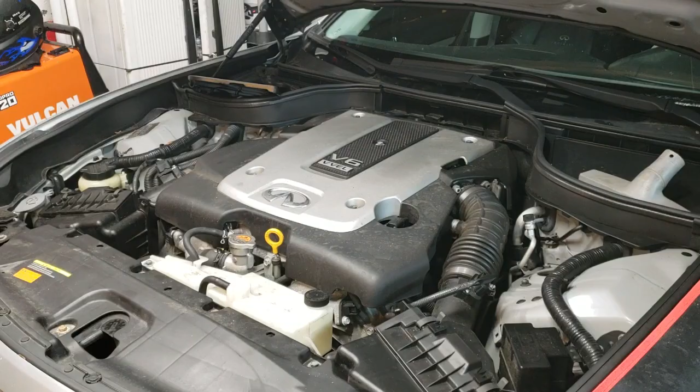Here I got my '09 Infiniti G37X, and it has a low oil pressure code. What I'm going to do is show how to take everything out from beginning all the way to the end, and then put it back together step by step.

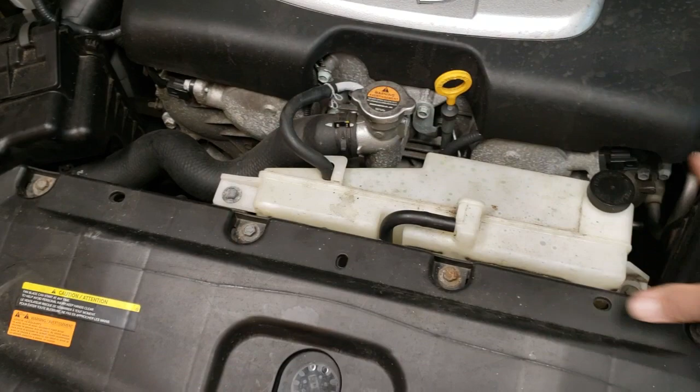Some shops charge $3,800 to fix this, others want $2,000 because it's kind of intensive. You got to take off everything here in the front, it has to come out. Some people take the bumper out, but I'm not going to go that far. I think just taking off the radiator fan and a lot of the accessories in the front should be more than plenty to access the oil galley gasket.

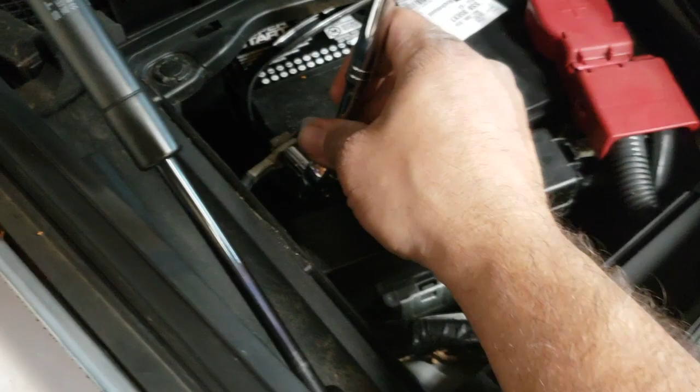One of the first things I want to start out with is disconnecting the negative on the battery. Alright, the next thing we're going to do is remove these 5 bolts to take off the engine cover. Here goes 1, 2, 3, 4, 5. I'm going to do that with a 10mm bolt.

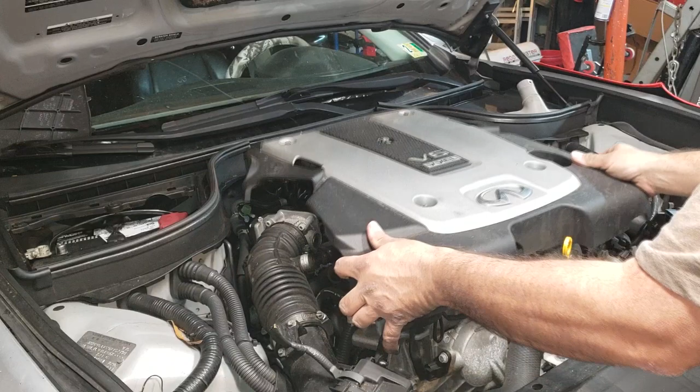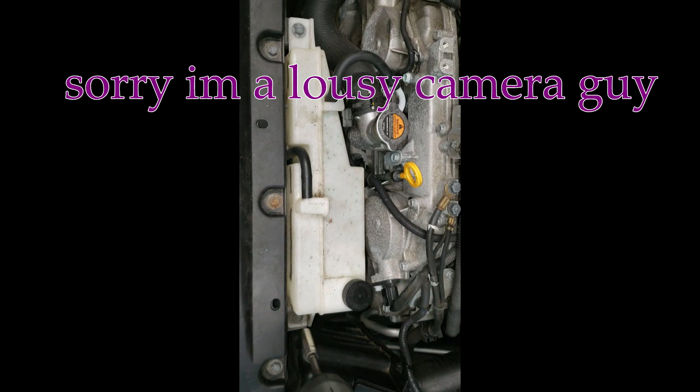Alright, the next thing we're going to remove is this radiator reservoir, also 10mm. Then disconnect the hose.

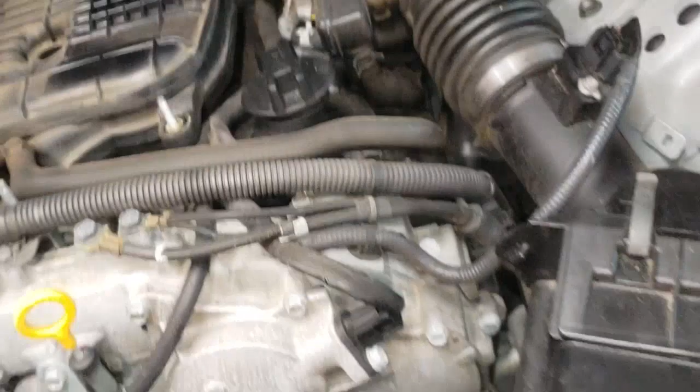Now the next thing we're going to do is remove this mass airflow sensor, and now we're going to do the same thing to the other side. Easier with one hand. What we're going to do is cut this little tie right here, move this out of the way, and do the same to the other side.

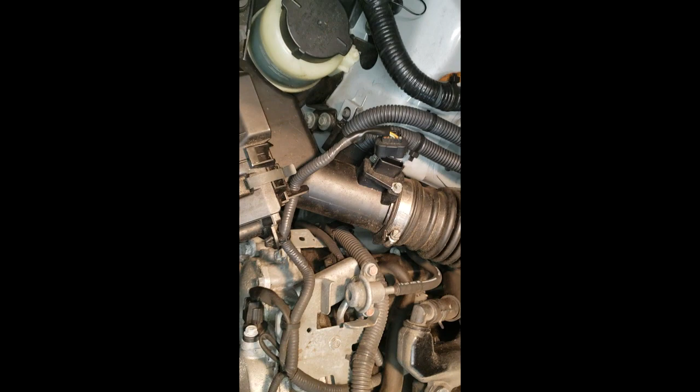Next thing, we're going to remove this air box, 10mm. Then we're going to loosen up this clamp, 8mm. And we're going to put it away.

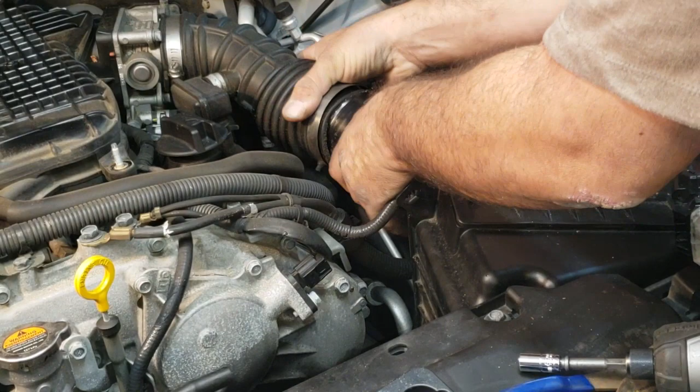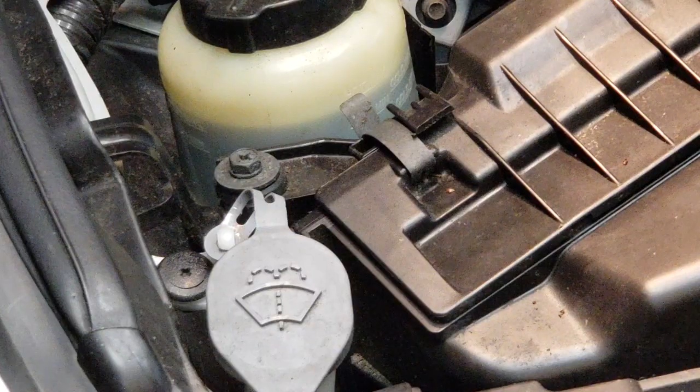Lift up. Same thing, I'm going to loosen up this clamp, and I'm going to remove this one bolt for the left air cleaner. Separate the hose, and lift up on the air assembly.

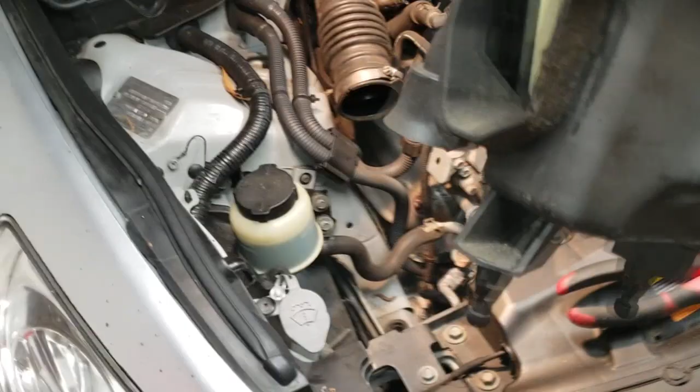It's tough. The other reason why it's kind of hard to pull out is it has a little rubber grommet on the bottom that it goes to, you can see it down there, and it snaps in, there's 2 of them. That's what makes it harder to take out. Now I'm going to take the bolt and put it back in so I don't lose them. Same thing on the other side.

Alright, the next thing we're going to do is remove the undercover.

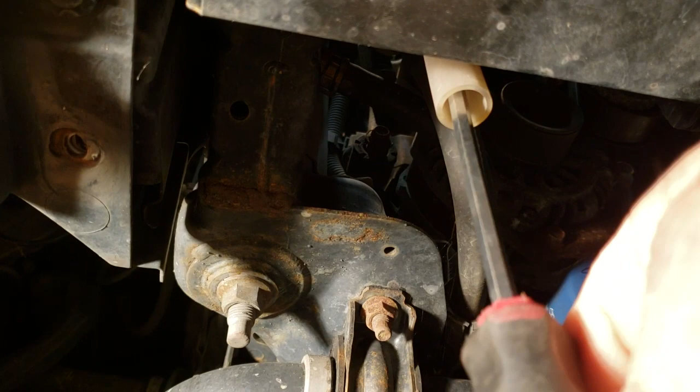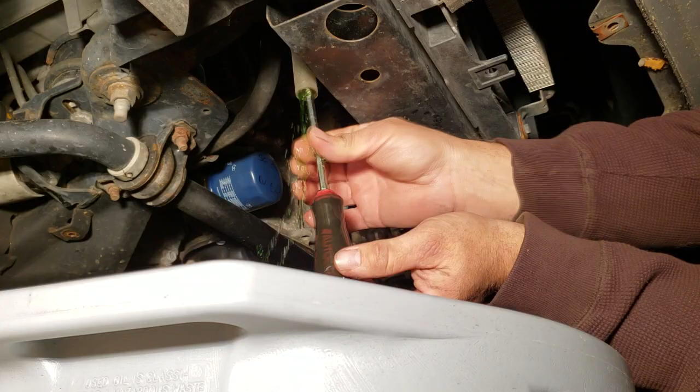And from the top, we'll remove the radiator cap. Comes out a lot faster.

I know I'm going to get a lot of questions like where did I get the instruction book for this car, because I've looked around and I have not been able to find a book for this car at any auto parts store. I haven't tried the dealership, but I did look online, and online there is a website where you can actually get this book. If you go to nicoclub.com, on the bottom right in the middle it says service manual.

You click on the service manual, and you scroll up to right there where it says Infiniti.

Sorry, I don't know how good this video is going to show from the camera to my TV. It doesn't look like it's going to show very well, but it's the best I can do right now.

And then you find the car that you currently have, like for me, I had the G37X, or just the G37. If it'll open, that'll be great.

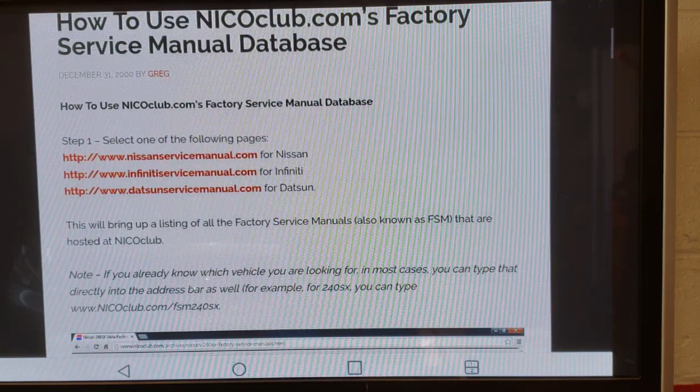Okay, try that again. Go into the Infiniti. Oops, my fat fingers hit the dots on one. Let me try it again. Infiniti.

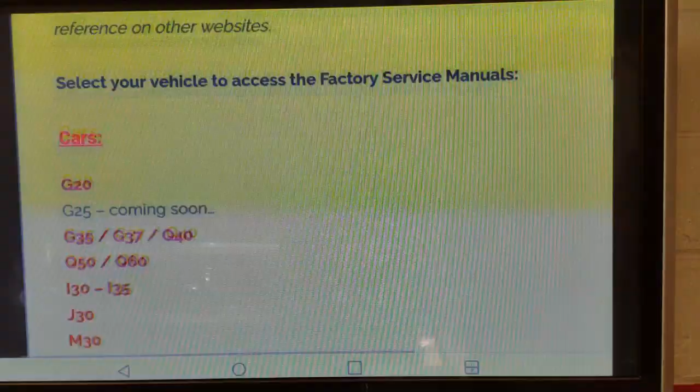Okay, Infiniti service manual, and then you click on the G37. Okay, you scroll down and you find the year. Mine is a '09 sedan.

And right there, these are all the things, all the contents for your whole car. It took me a while to figure it out, but I did print it out, and as I opened each one, I was able to write down next to it what it is, so I can use it as a reference.

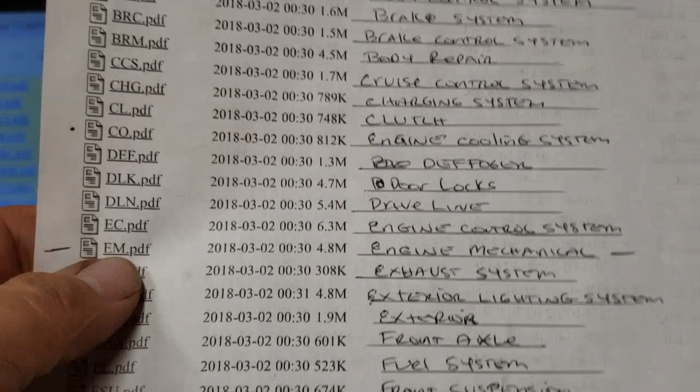Like that CO is engine cooling system. This is the one that I've been using, it's EM, engine mechanical, and that's where you're going to find all the parts. Then you got the EC, which is engine control system.

And I'm going to click on one so you can see what I'm talking about. I'm going to click on the one that says EM. That's the one that I've been using.

I don't know if you can see me. Right here is all the contents. You can just scroll up.

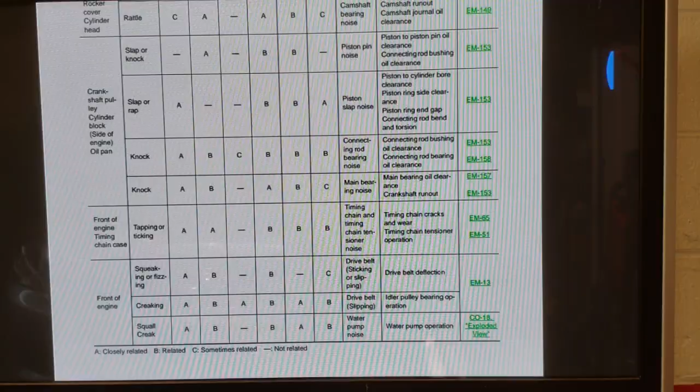And this is your repair manual. I was able to download it into my PDF file, and in my PDF file I found it a little easier to scroll through a lot of these pictures.

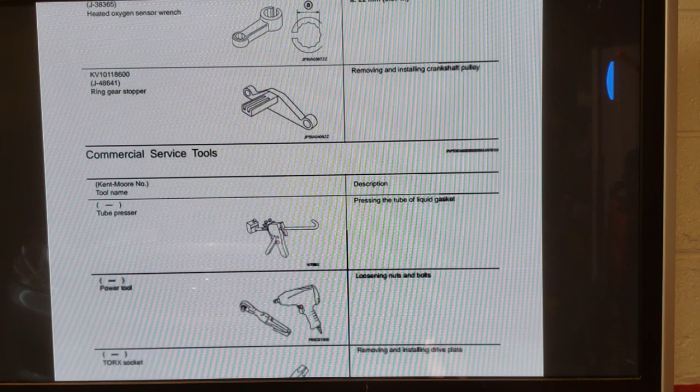The one that I'm doing is how to remove the timing chain. I'm going to make it easier myself. Since I already downloaded it, I'm going to go back to my PDF, and I'm going to close that out.

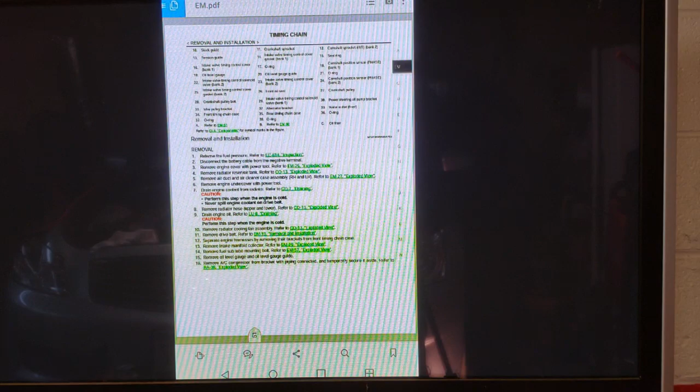Because I find it a lot easier to scroll through everything here. Engine mechanical, okay see? And whenever you get out of it, it'll actually save the page that you're at. The one I'm looking at is timing chain, because that's how far I'm going to go into the engine, to get to the timing chain.

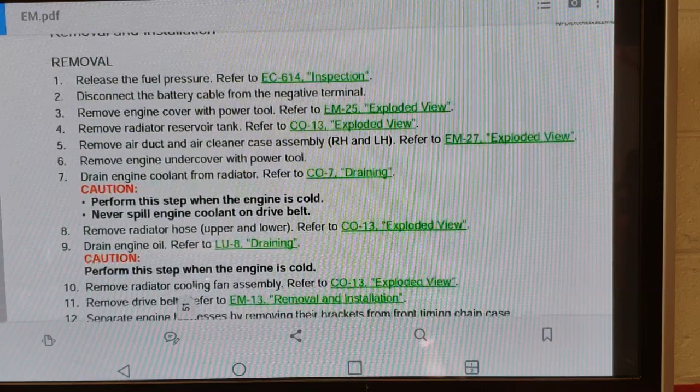Each one of these, like release the fuel pressure, you go to your engine control section 614 and I'll show you how to release the fuel pressure. Then you go down the line, disconnect the battery cable, remove the engine cover with the power tool, which I'm going to show a lot of these, but I'm not going to keep showing it each time, just to give you an idea.

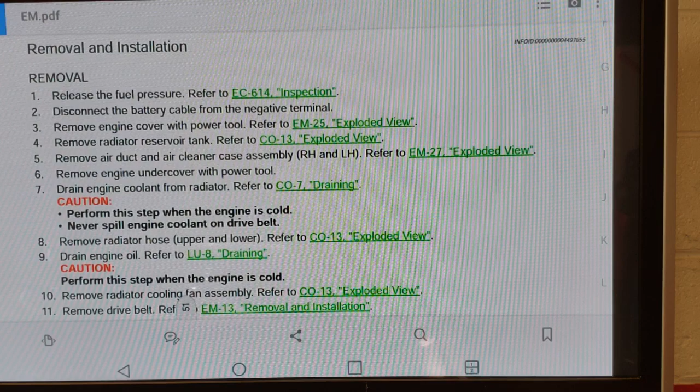And then, like for example, draining the engine coolant. What I do is I go back into my PDF because I already saved that also. I'm going to back it up a little bit, and there goes CO for coolant. Right here it's showing me how to drain the cooling system, draining, it's right there.

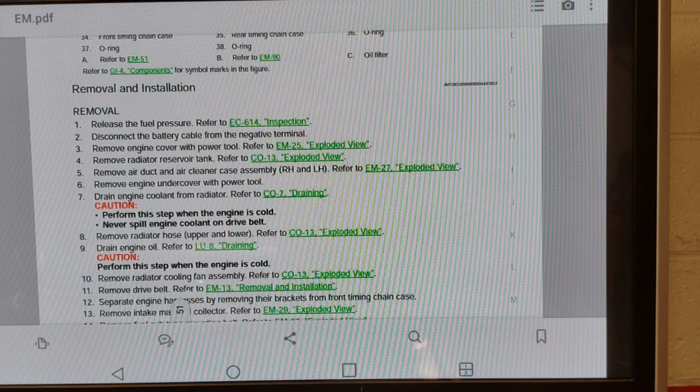Yeah, right there, so let's get started. The next thing I'm going to do is remove the upper radiator hose.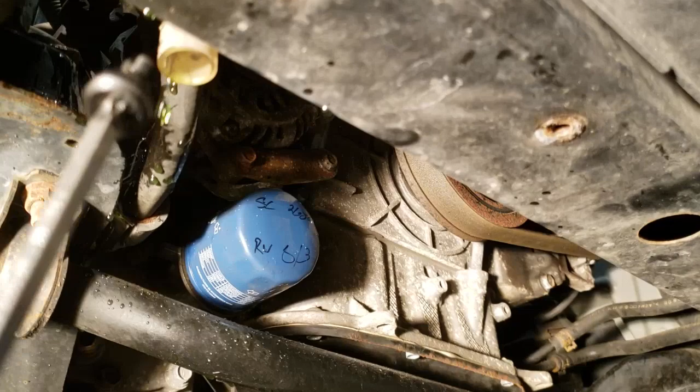Now, the next thing I'm going to do, I'm going to reinsert this little plug because I don't want to lose it. I think the coolant should have drained plenty.

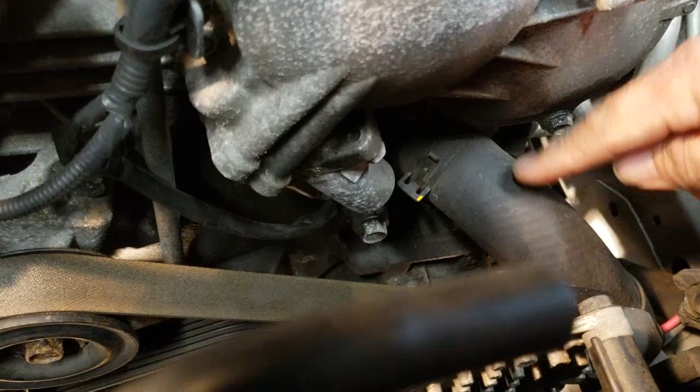Alright, the next thing we're going to do now is remove the lower radiator hose. Now we're going to get underneath the car and remove the lower radiator hose part right up against the radiator.

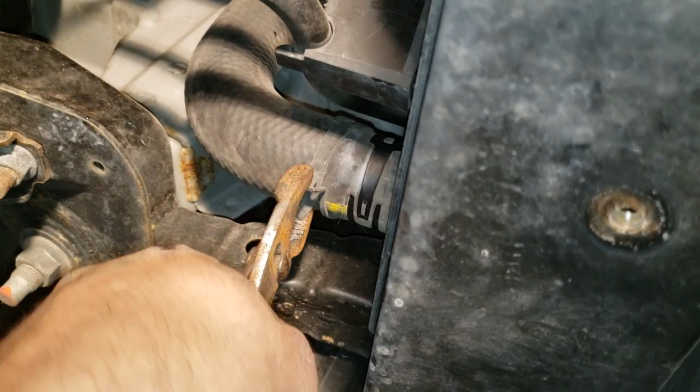Let's see. Okay, I'm now going to remove the radiator hose. There you go, take it out, put it away.

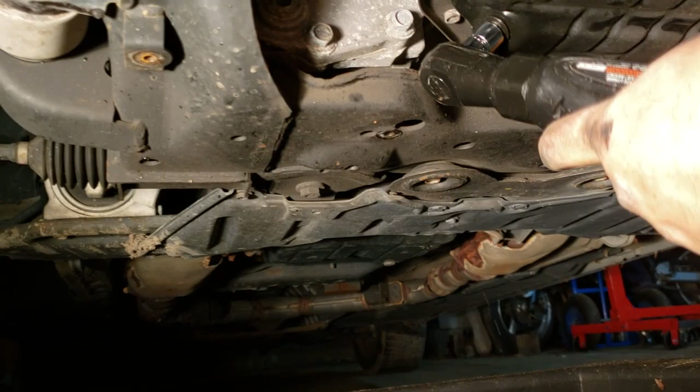Next, we're gonna go drain the oil. Simple 14 millimeter. There you go.

Okay, the next thing we're gonna be doing is removing the radiator fans. We're gonna remove this electrical connection here first.

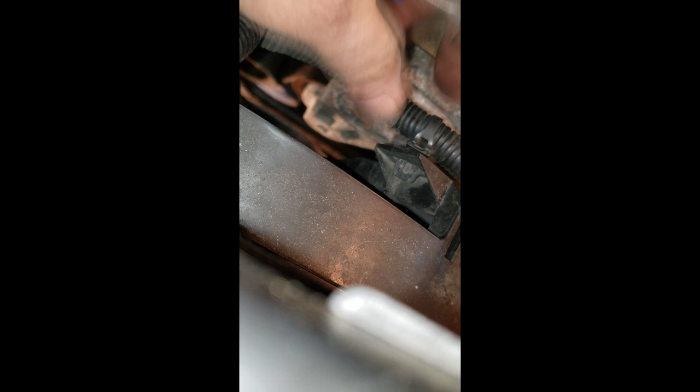We're going to try to remove this clip right here. Try to get behind that thing. Come on. There you go, squeeze it. Back in. Alright.

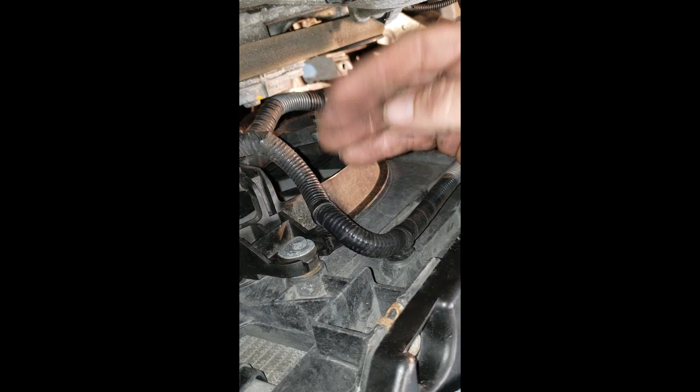Got another one here, but let me see. Got another one here, but I'm gonna pull the radiator. I'm gonna try to pull the fans out, see if I could get it from behind. I don't want to break it, I already broke one on the other side.

Next thing I'm gonna do is remove this sensor here. Now we're gonna loosen up the radiator, the other one's over here. Okay, from the bottom of the radiator, you gotta loosen up these two hoses from the support.

Alright, the next thing I'm gonna do now, I'm gonna remove this belt. To do that, we're gonna have to loosen up this idler pulley right here. I got a 14mm.

Okay, then the next thing I'm gonna do now is insert this 3/8 in here. I'm gonna pull on it real hard, and I'm gonna line up these two holes, and I'm gonna shove this Allen key right inside there to hold it.

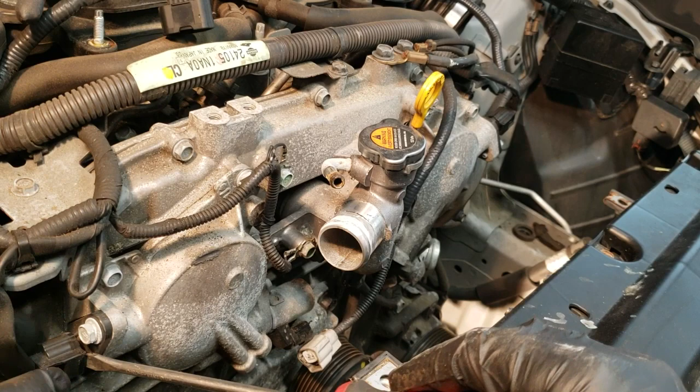The next thing I'm going to do is remove the wires from the harness, or the harness from the timing cover. Okay, that's one. Two.

Remove this clip from there. Okay, I removed this one. All you gotta do is just squeeze the sides with a needle nose, and it'll pull right out. With a 12mm, I'm gonna take out this one. It's too long.

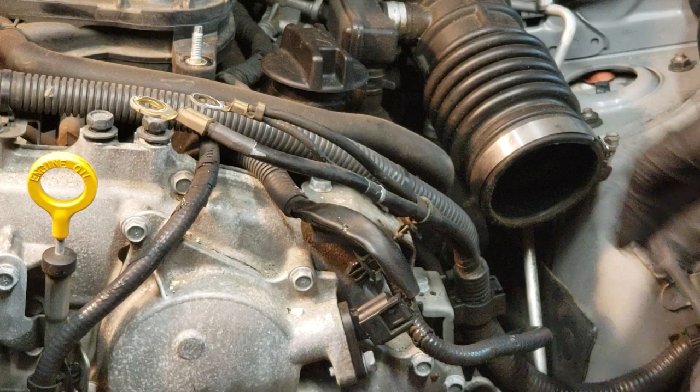I'm gonna put this back in. Thing over here.

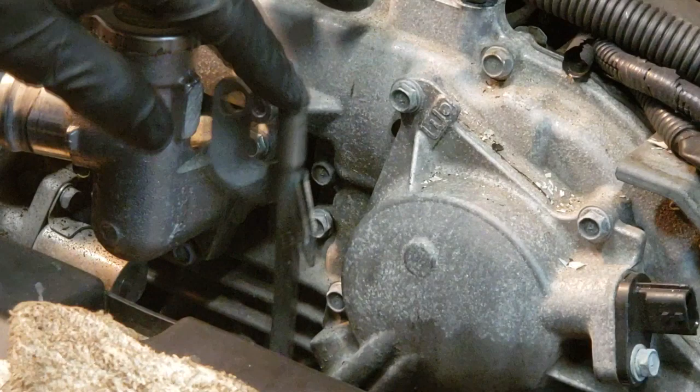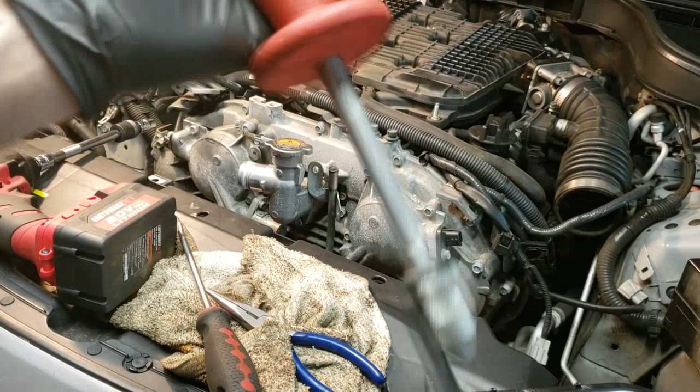I should pull. Alright, now to take this oil filler tube out, I ended up using this little slide hammer. I put an attachment like this.

All I got to do is just put it under here, like that, and it pops right up. Alright, the next thing I'm gonna do is I gotta remove, or at least move to the side, the AC compressor. There's just 3 bolts.

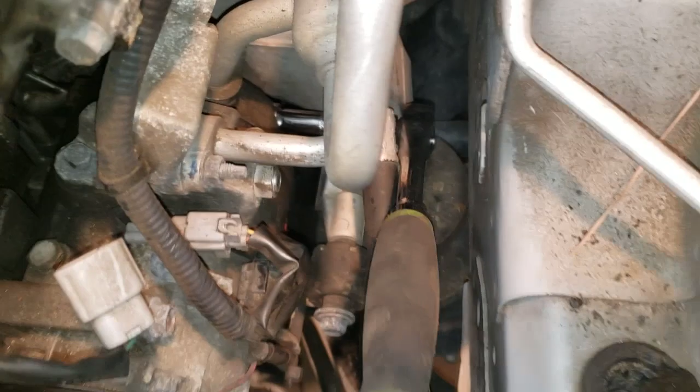There's just one there, one above, and one in the back. The back one is a real pain because you kind of have to squeeze your socket. I have to use an extension with a deep socket, thin wall, just to get it in there. I'm going to try to break it loose.

Yeah, it's a little tight. I'm not going to take the bolt out because I'm not taking the AC compressor out. I'm just going to move it to the side.

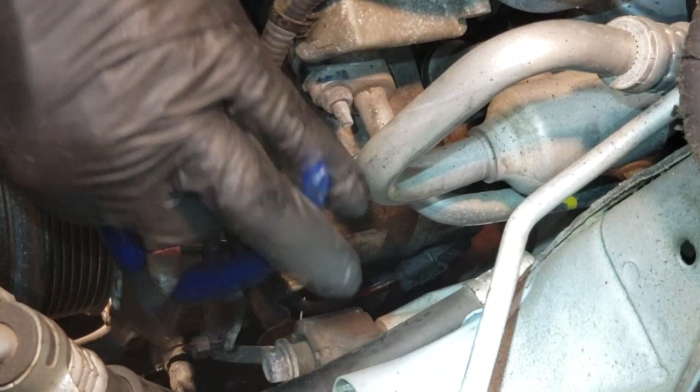The next thing I'm going to do is remove this wire. I'll try to cut this zip tie down at the bottom so I can loosen up that wire. So at the bottom one.

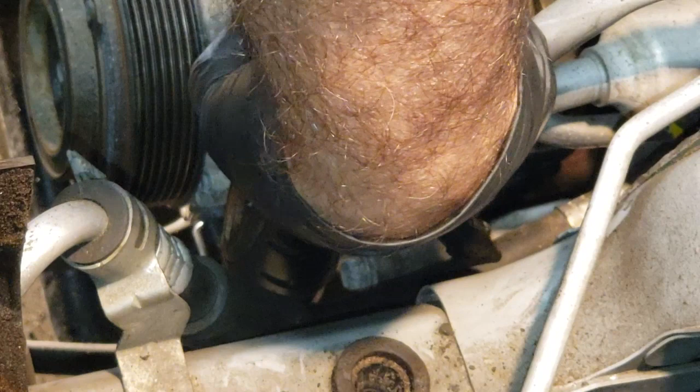The reason you gotta remove this AC compressor is because it's bolted to the timing cover. Now it's out of the way. It shouldn't interfere at all.

The next thing I'm going to do is remove these outer pulleys. There's 3, well, I already took out the one that came with the tensioner. But you got to remove this one to get to the bolt that's behind there.

Okay. Oh, shit. Oh. Apologize if I blocked the view. And this one.

Now I'm going to try to attempt to remove the power steering pump. There's a 14mm bolt right there in the gear.

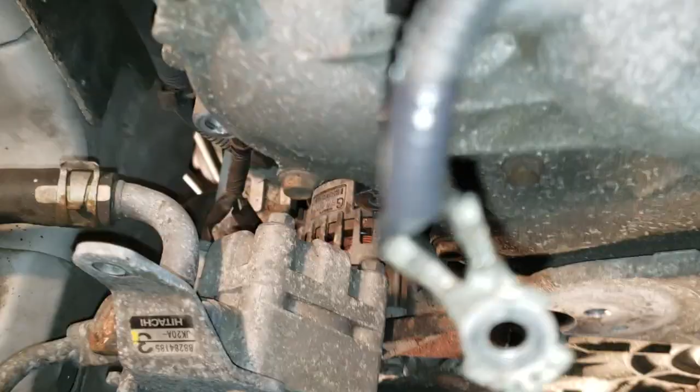Alright, the next thing I gotta do now is I gotta remove the power steering bracket. Let me see if I can get it in there. Power steering pump bracket, so you got one bolt right there. And then once I remove that bolt, I could take off the idler pulley bracket. But then back there, I got two more bolts, and those look like it's gonna be a royal pain to get to.

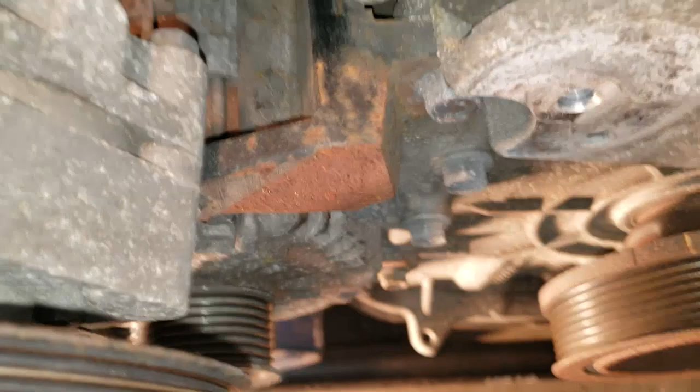And then after that, remove the alternator, or at least move it to the side. I don't know about removing it. See, with the power steering pump, I just moved it to the side for now.

Mostly it's going to be down at the bottom, but this one is going to be up here on the top. Let's keep taking some of these bolts out off the timing case. And put that nut back.

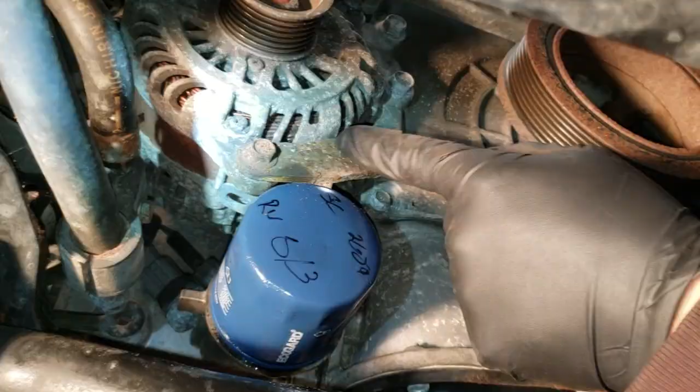Alright, so looking under the car, what I'm going to do now, I can take the alternator out. It's this bolt right here, and this bolt right here, and this one up here. Alright, loosen that up.

Okay. I'm gonna take the filter out. Oh man, I need to make more room.

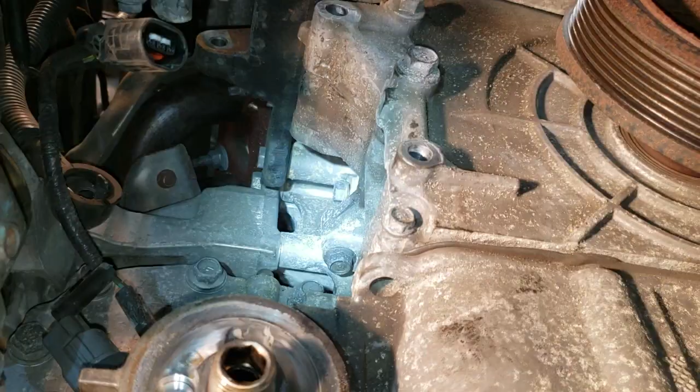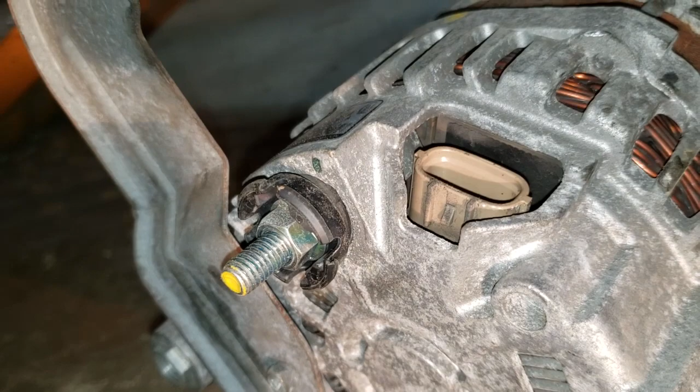Okay, I removed the alternator. Sorry I didn't show how to do it, but it took 2 hands and I don't have a way to film it. But it's really simple: this one 12mm nut there, and then the clip. It's easier to take them off once you take the alternator down, and then you turn it sideways to access the back of it.

Okay, now I'm gonna remove that alternator bracket right there. It's not hard, it's just that I'm in such an awkward position. I'm gonna need my 2 hands again.

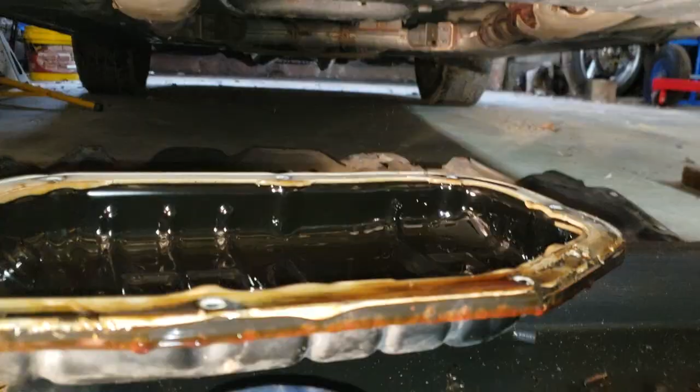Got the oil pump, the oil pan. Got the oil pan down. Now, one thing that has me worried is that I found this.

I have no idea what this is. Let me see if I can zoom in. It's metal. And I actually found that in the pan. Actually, I found it in the strainer.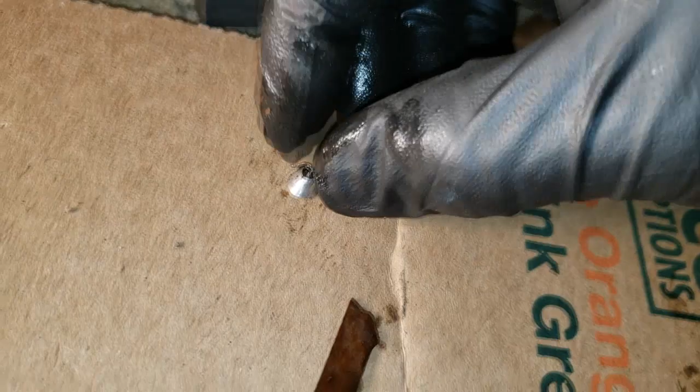What the hell? Something else is in there. Let me see what's in there. Oh, look what I found in there. Looks like part of the paper gasket. So I found these two things inside the strainer: metal, and paper.

Look at the pan. Let's see.